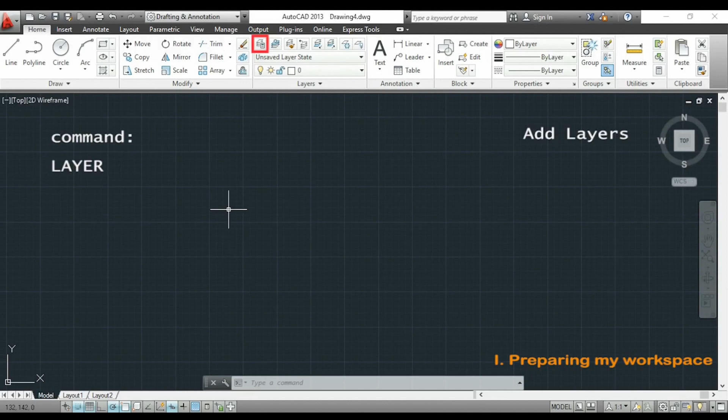Type 'layer' with my keyboard or click this button here. This is the Layer Properties Manager. To add a new layer, just click somewhere in this box with the right button.

Now I will click on New Layer. For my first layer, I will name it Walls, and I will do the same for all the other layers. The second one I will name Doors, this one Windows, and the last one will be the dimensions for the dimension lines.

Now I will change the colors for all my layers. Have in mind that we can change these colors anytime we want. I also like to use light colors because they are easier to see.

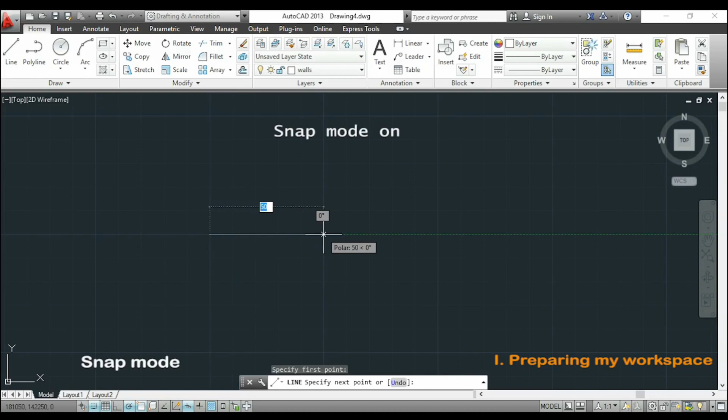Now in the bar at the bottom there are a few things to set up before starting to draw. The second button here will switch the snap mode on or off. If I have snap mode deactivated, we will not have any precision when drawing lines, as you can see here. On the other hand, if I switch it on, you'll notice I can only move my mouse in certain points, in this case at a distance of 5 millimeters.

To set this up, I can click here with my right button and then on Settings. In this box I can change my snap spacing. As I told you before, I have it set to 5 millimeters.

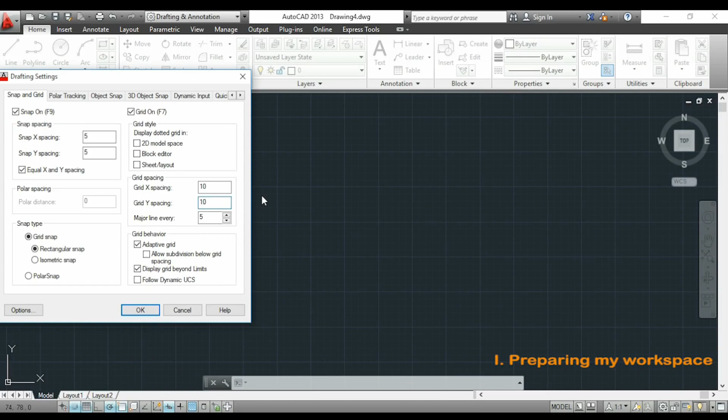Now, if I am using the grid, I can also change the spacing here. If you look at this diagram on the right, you'll see that my grid has a major line every 5 secondary lines. You can change that in this box here.

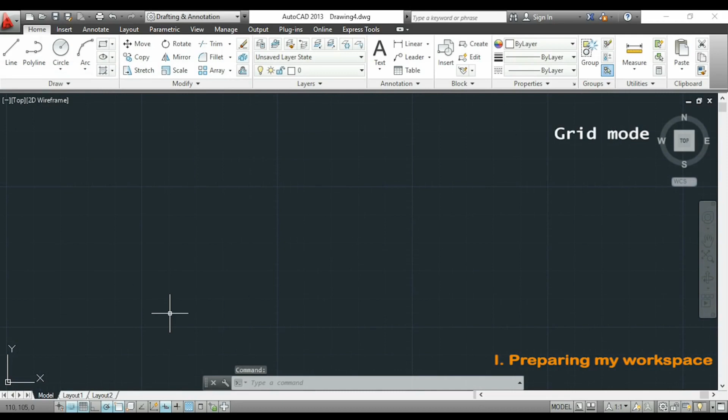Another thing, if you want to switch on or switch off the grid, just click this button.

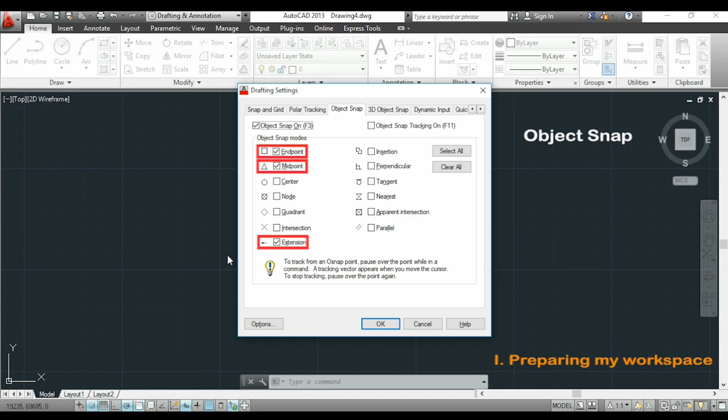One last thing we should activate before drawing is the object snap. This is very important to draw with precision. I will type OSnap. As you can see, this acts like a magnet, and you'll understand why. In this panel, I can choose the points I want the magnet to use. In this case, I will select only endpoint, midpoint, and extension. Finally, I click OK.

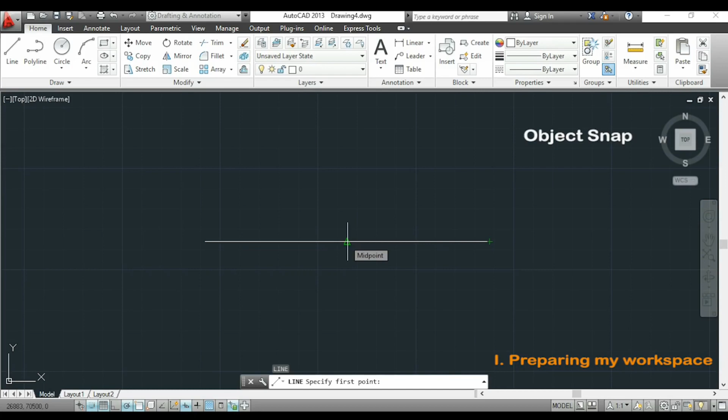Now I will show you how it works. I'm going to draw a line. I click Esc and then Enter to start the same command again. Here you can see the endpoint appears on my screen. If I click there, the first point of my new line will start precisely from that endpoint. But instead I'll move more or less to the middle, and you can see the midpoint indicator. If I click when the triangle is on screen, my next line will start exactly from the middle point. Now I am ready to start my drawing.

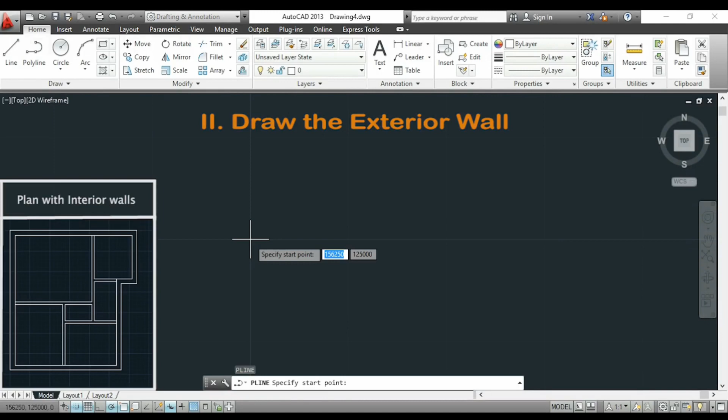The first thing I'm going to draw is the first line of the exterior wall, using the polyline command. This is very simple: I just insert the length of my lines until the boundary is completed. Also be sure the polar mode is turned on, since we need it to draw precise horizontal and vertical lines.

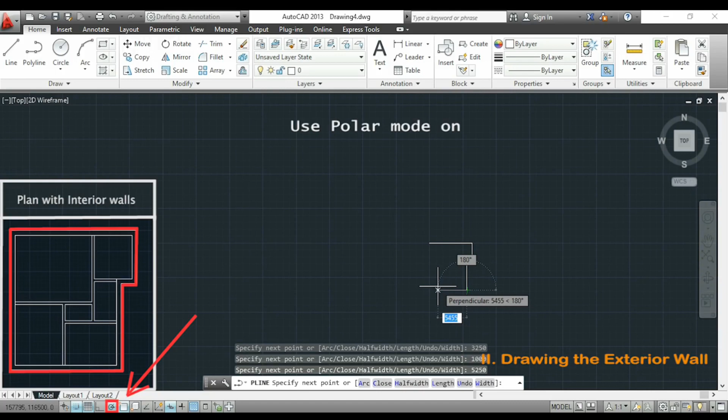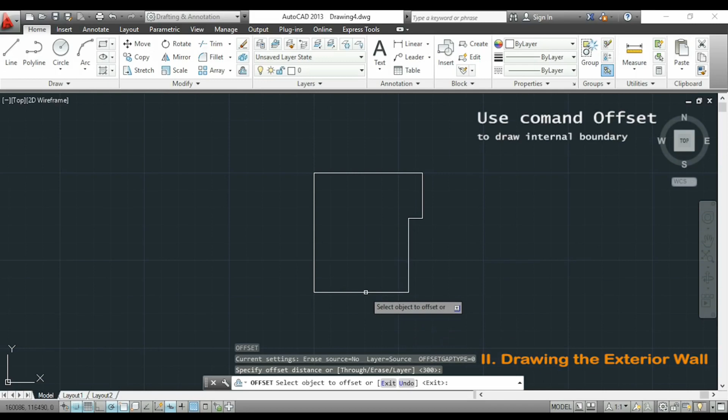Once that's finished, I'll draw the second internal line of my wall using offset. I'll type offset, or simply O. It asks to specify the offset distance, and I'll type 300 because that's the thickness of my wall. Now I select my object and click on the middle, and as you can see, my exterior wall is finished.

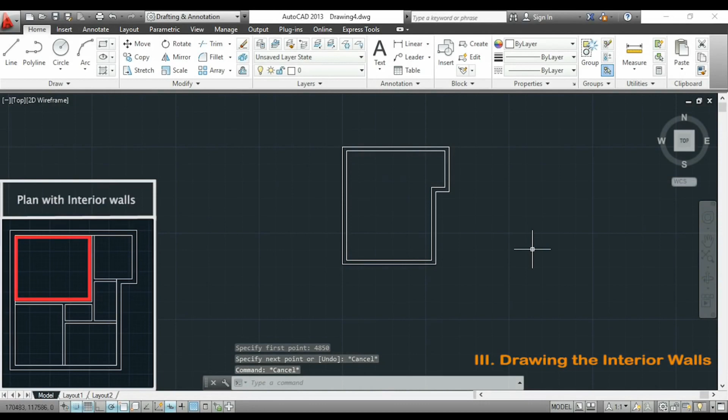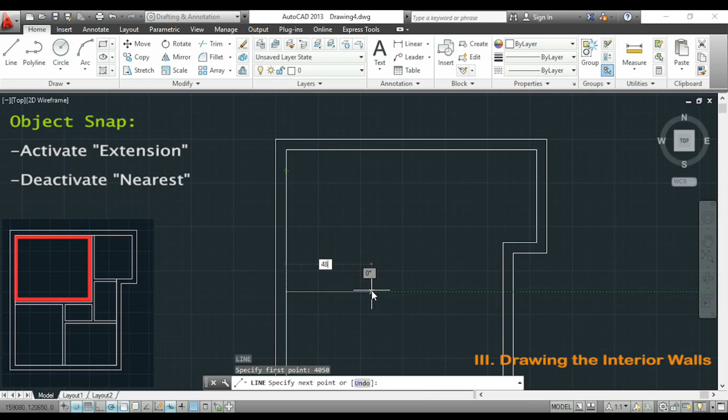My next step is to draw the interior walls. There are several ways to do it, but I think the fastest way is to draw room by room. I'll draw the first room using line. I put my mouse pointer over the corner without clicking, then move down slowly and enter the distance from the green cross where I want to start my line. To do this, I need to activate the extension object snap and deactivate the nearest option. Now I enter the length of my room and draw vertically until I reach the exterior wall. So the first room is done. Now I do the same for all the others. For example, here from the endpoint I move to the right, type the distance, and click Enter.

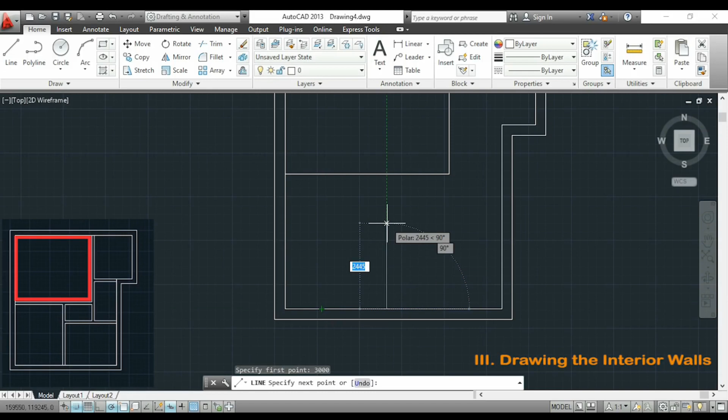For the last room, I'll use the grid to help me. I know that wall thickness is 15 centimeters, which corresponds to 3 squares at this zoom level. For cases like this, I find the grid very useful as a reference.

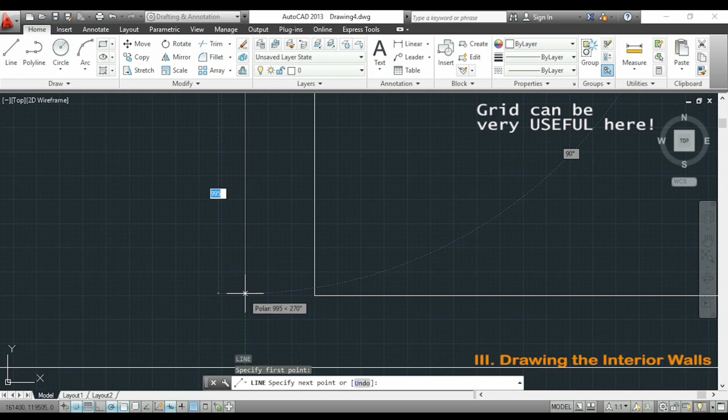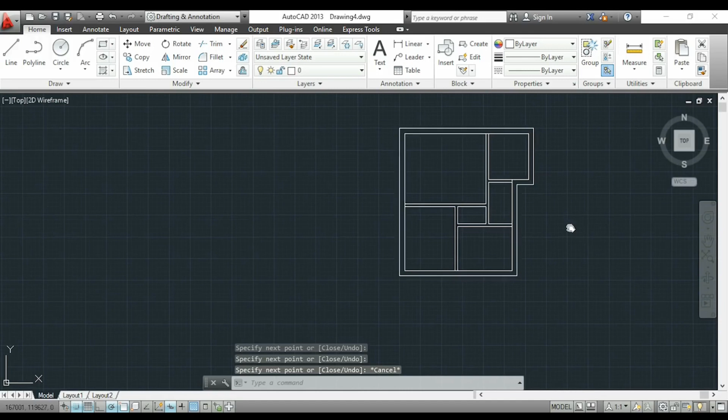Now I have finished all my walls. That's all for the first part of this tutorial. In part 2, I'll show you how to draw and insert windows and doors without spending too much time. Thank you very much for watching, and see you soon!